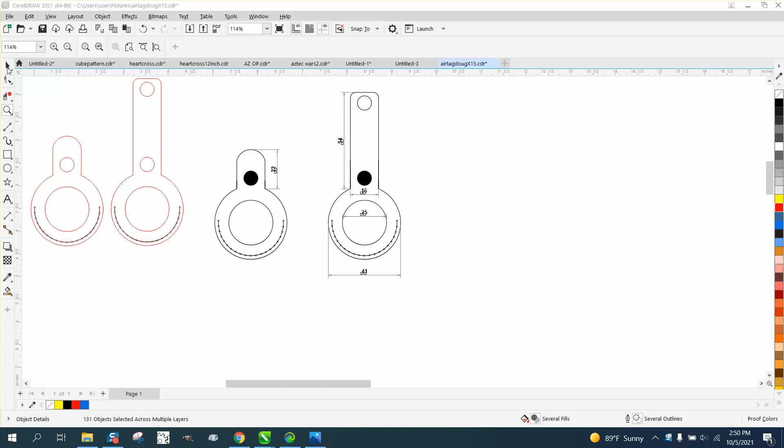Hi, it's me again with Corel Draw Tips and Tricks. I stated in the first video that this took so much work, I guarantee you could redraw it from scratch faster.

Let's just try it. We've got all the measurements, we've got everything we need, and this is a good reason to draw this one first. We've got a 41, so I need to change my measurements to millimeters. I'm going to draw a 25 with my ratio lock, then Control D to make a duplicate and make the next one 41. We're already there.

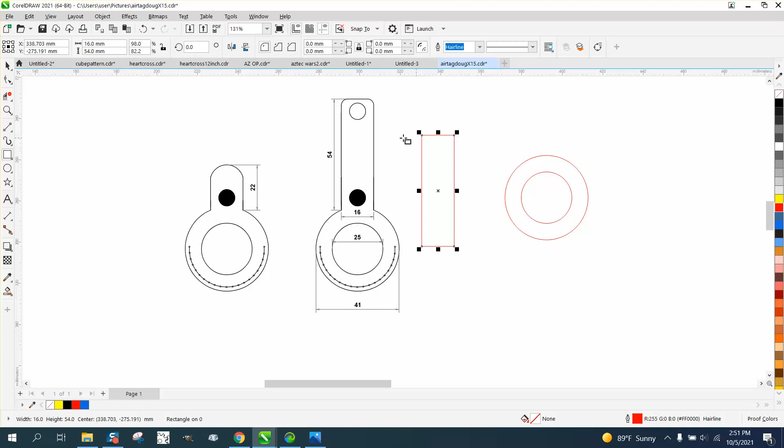Now we're going to make a rectangle that's 16 by 54. Unlock your ratio, 16 by 54. We want to round off those top corners to make it look like that top corner. With our ratio unlocked, this is your top, we're just going to start rounding them over. This is a personal preference, we're going to go 2.7, 2.7. We're almost already there.

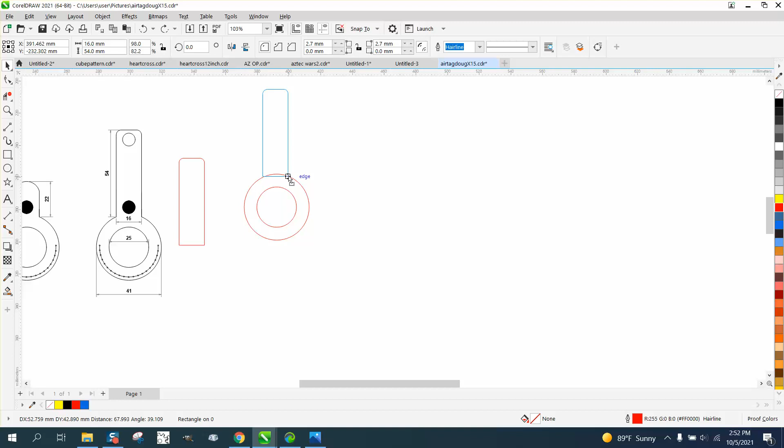Now we need to take this rectangle and apply the 4-point cross to it. This is where I want to draw in the center of the page, and I'm going to show you why. I'm going to hit P and draw in the center of the page.

A lot of people make comments about me drawing so much in the center of the page, but I'm just going to hold down the control button and lift this up straight until it snaps to that intersection. I'm going to take those lines, and if you watched the first video and saw my leaks, let's see if I get any leaks now. No leaks. Good file. We're almost there.

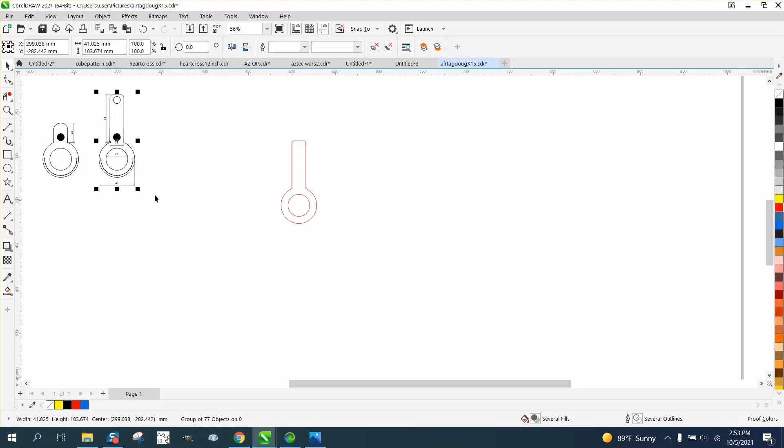Now, because you have the file, we can Control G and group this together. Let's put my rectangle on top of mine. It's a little bit difficult because of the circles, and you know what, we don't have to do that. Let's move this out of the way, put that back in the center of the page. We have an ellipse there, let's ungroup it.

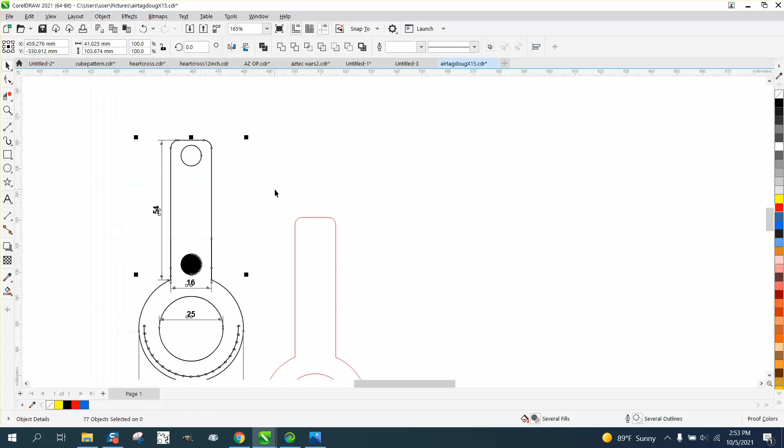You know what, you could borrow that ellipse, but it's 8.001 millimeters. Hold down the control button, 8.001. Remember I unlocked my ratio, so I need to lock it back. 8.001, hit P, hit enter, put it in the center of the page.

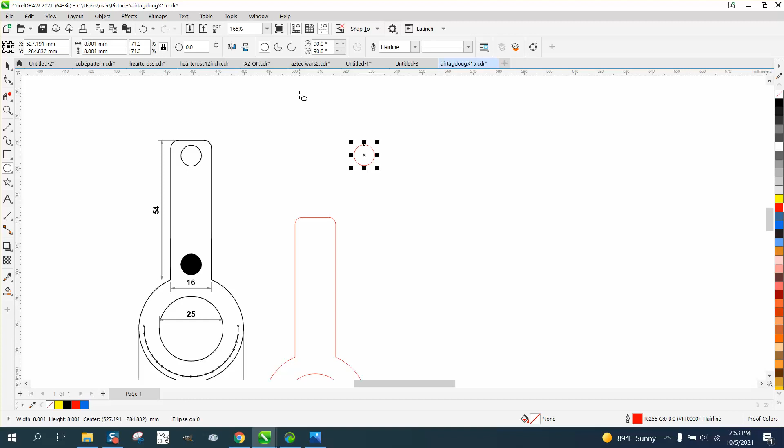We can measure how far this is from the top, even though the drawing's a little bit big. We're going to go from the center of that to the center of that: 1.95. We're going to change our nudge distance to 1.95, grab this item, hit T to put it right to the top, and nudge it down 1.95. We could do the same thing for the other one, measure the distance.

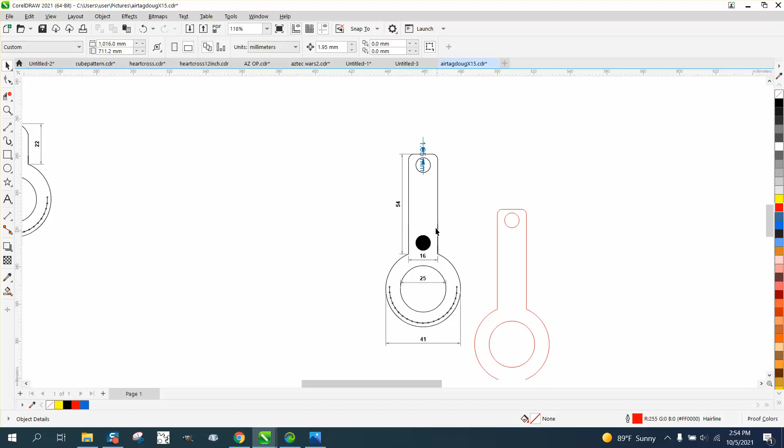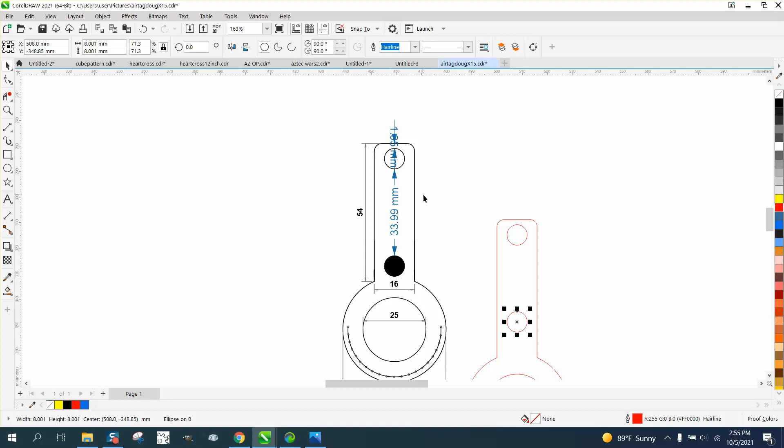This is a wrap around a keychain, so it doesn't have to be perfect, but we're going to make it pretty close. 33.99. Change your nudge distance to 33.99. Grab this one, hit the plus key and nudge it down 33.99. No, that's not right.

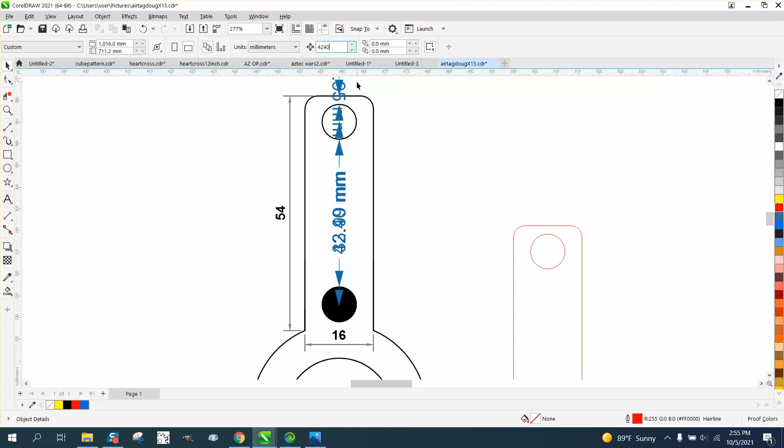It's going from the center. Let's back up here, let's just delete that one. So really, we need to take the Smart Fill tool and go from the center to the center. 4240. Change our nudge distance to 4240. I didn't put a decimal. Hit the plus key on the keyboard and move it down.

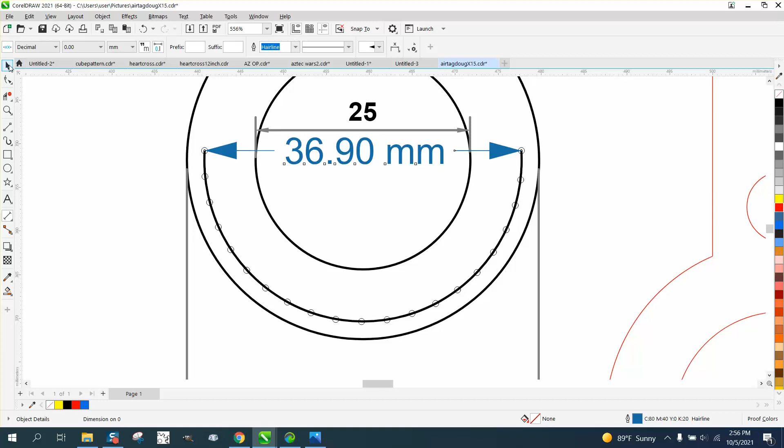You can always bring your file back in and look at it. Now the hardest part, the thing you've got to figure out the most, is that this is like half of a circle. So let's take the parallel dimension tool and measure from that node to that node, and we got 3690. Let's take an ellipse and make it, well I got close, 36.9.

Let's hit, well we can't hit P and put it in the center of the page because we've got the whole thing, but we only need half that. So the easiest way to do it is take a 2-point line, hold down the control button, snap this to the center, and take your virtual segment delete key and delete that. We could have done it several different ways.

It might have been easier to do that inside there because now I'm going to have to get this lined up perfectly in between here. Something's not right, no, it is. And as long as you did both of them the same, you know what, let's back up here.

Let's take our circle and put it in the center. Now we can nudge it to the right, put our line in the center. That didn't look right. Take the virtual segment delete key and delete that part. That's what's so nice about the nudge key. Then nudge that back and we got it.

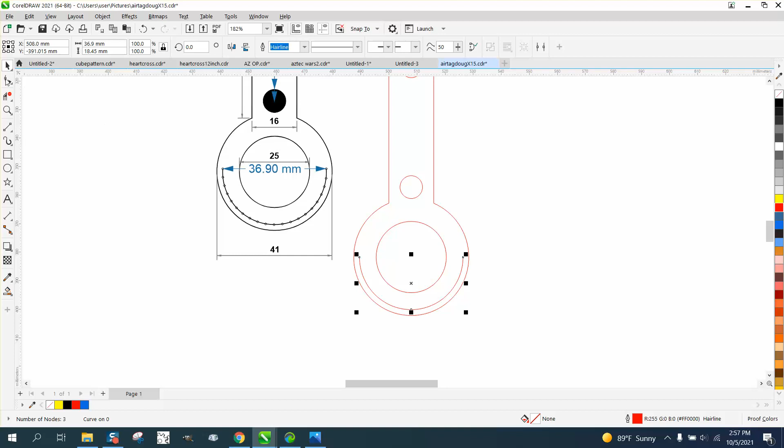Now, how big are these holes? That's all you need to know. They are 0.72 millimeters. I'm going to make that what it is, a hairline. Boy, that's a little bitty line. 0.72. But that is a hairline. That, I don't know what that line is. Less than a hairline, that's pretty weird. No, it is, but whatever, regardless.

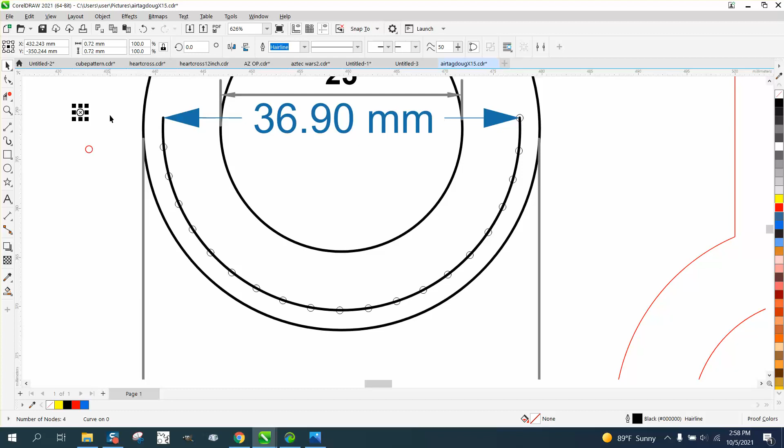Now we've got one, so 1, 2, 3, 4, 5, 6, 7, 8, 9, 10, 11, 12, 13, 14, 15, 16, 17, 18, 19, 20, 21. There's 21 of them. So easy.

Let's grab it, put it over. Why can't I move it? Let's move it over here. Hit the plus key on your keyboard, move it over here, select them both.

Go up to Effects and Blend. We need 21, we've already got 2, so we only need 19. Hit apply. New path, put it on our path. Blend along full path, look at there.

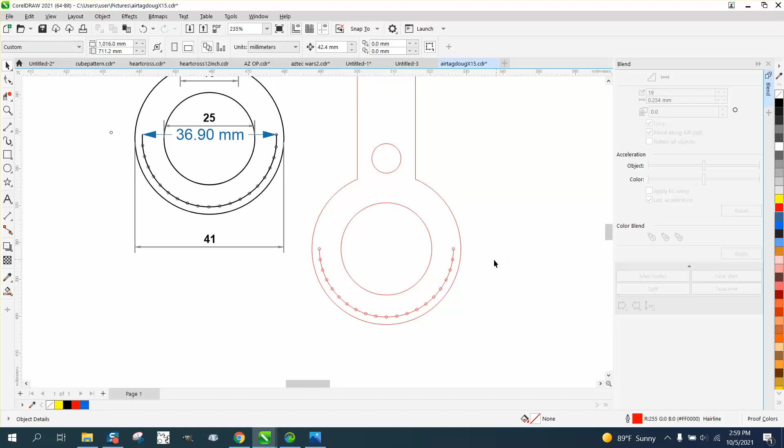Now we need to take this line and break it apart because this needs to be... I'm going to have to grab it all to break the blend apart.

Now we need to take this line and make it a black line and something thicker than a hairline, so it will engrave. I think that's going to be too thin. Whoa.

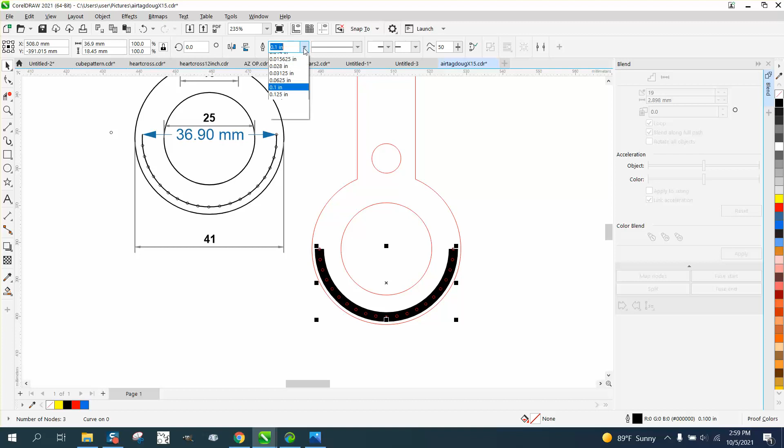There we go. Project finished in a lot less time, and then all you have to do for the next one is just put it on top there like we did in the other video, or don't even have to do that, just get that curvature.

You know, 22 millimeters off that top, make a curve. Anyway, fun project, hope that helped. Thank you for watching.